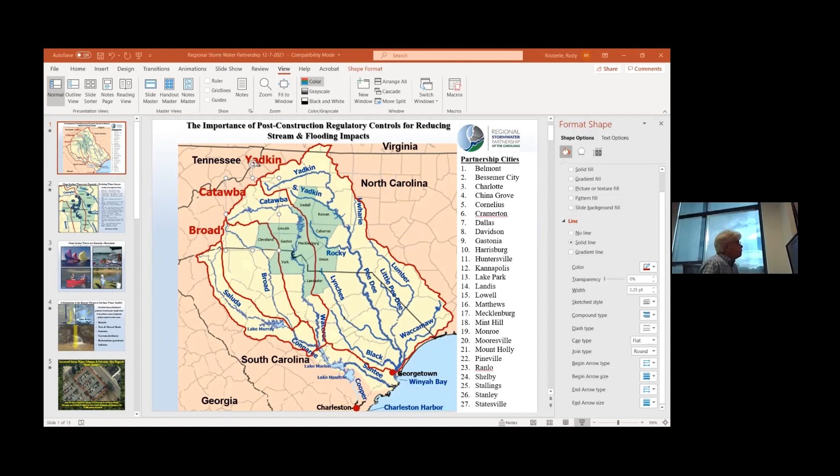Well, good morning everybody, hopefully you can hear me, and hopefully right, is that true? Yes Rusty, can you make it a full slide screen? They're seeing it as a PowerPoint view. Can you make it the full slide? Perfect, thank you. Okay, are you seeing that now, Regina? No, not yet, try again. Now I'm pushing the button. Okay, and it's not coming up. Let me stop sharing, try to do it again. Well thanks so much Rusty, that'll make it easier for everybody to see the full screen view, everybody appreciates it. Yeah, let me see, let me try here now. Got my buddy David Caldwell in here. You know, he's my, that's really a sad, that's the great thing, you know. It is a great thing, it's always great. Okay, now let's see here. Share screen. But why in the world do I have all these different screens open? Can you just share your presentation? Okay, how about now? Perfect, thank you so much, looks great.

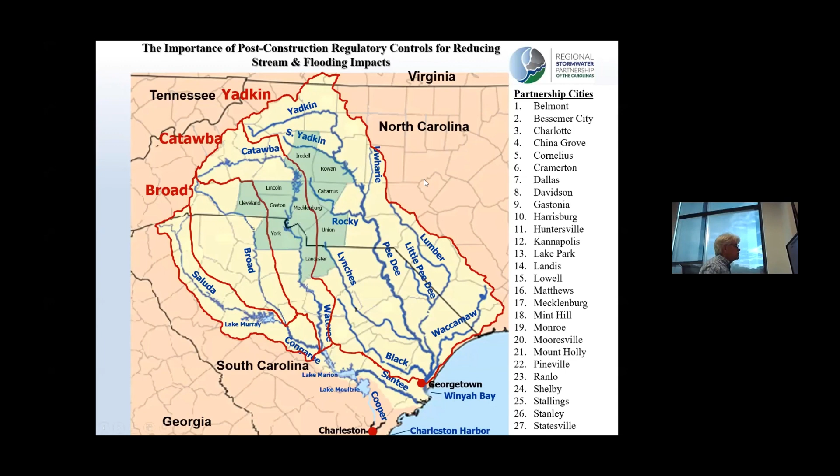To know about the Piedmont of the Carolinas, our region in particular that we're talking about today, is that groundwater is not a viable source of drinking water. It just does not provide the yields. So a lot of smaller communities used to rely on groundwater supplies, but as they grow, they have to tie into a surface water source.

Maybe they join in with, like Stanley has tied into Mount Holly's drinking water supply. Some other communities have tied into Gastonia's drinking water supply. So ultimately, as we become more urbanized, we all end up pulling our drinking water from a surface water supply, right?

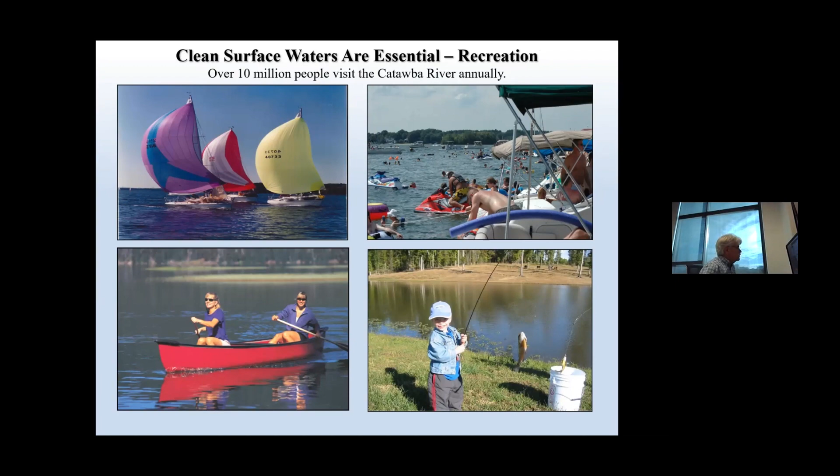Other than as a drinking water supply, obviously these surface water supplies are hugely important for recreation. Duke Energy estimates that about 10 million people visit one of those Catawba River lakes every year, and that is supposed to increase significantly. So our surface water resources are extremely important, obviously. I think y'all probably realize that. Hopefully this is a reminder to you.

But the other kind of hidden bullet or secret bullet associated with urbanization is the increased volumes and velocities associated with the increased impervious area.

So if you take an acre of trees here in our region and put an inch of rain on that acre of trees, the trees will soak up that water. A lot of it will settle into the ground and become part of the groundwater supply, but there will be basically no runoff from that 1 inch of rainfall.

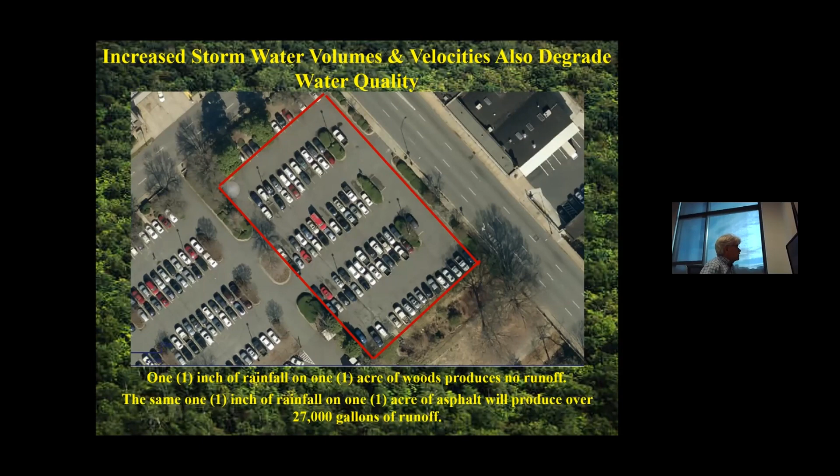But if you cut those trees down and put an acre of asphalt, that same 1 inch of rainfall produces 27,000 gallons of runoff. So that 27,000 gallons of added runoff causes the volume and the velocity in our receiving streams to increase.

So this creek scour, this creek instability, is sort of the death blow for organisms downstream. And we believe here in Mecklenburg County our biggest source of stream impairment is lack of biology. We have tied that back predominantly to the increase in volume and velocity associated with urbanization and increase in impervious areas. And if it's not already happening in your community, it will happen soon.

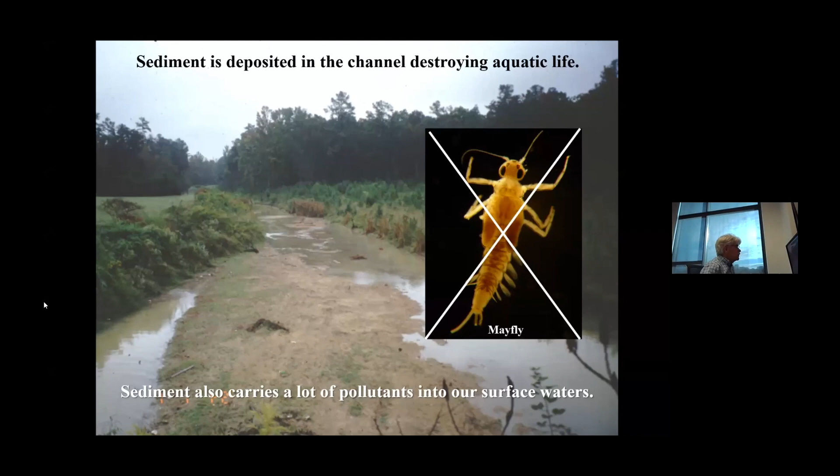So 1 inch of rainfall in Mecklenburg County with its impervious area will generate 2 billion gallons of runoff, which is enough water to fill Panthers Stadium 8 times.

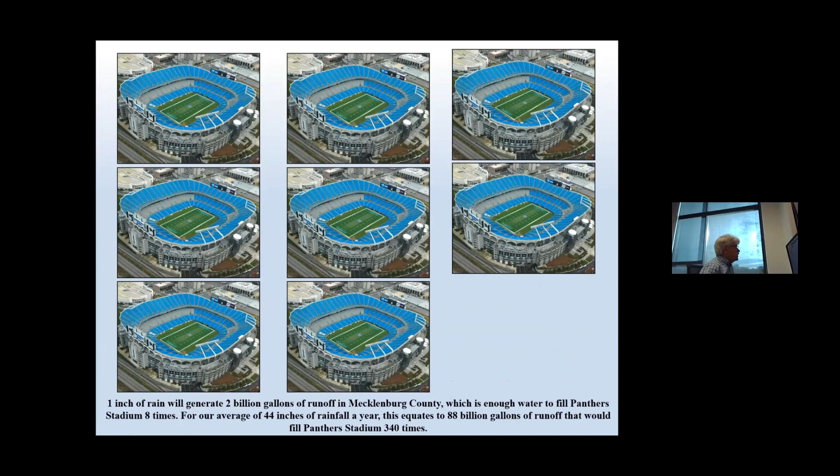Okay, we get about 44 inches of rainfall a year. This equates to 88 billion gallons of runoff, which would fill Panthers Stadium 340 times. That is a lot of water carrying a lot of pollutants, moving real fast and increasing volumes in our streams that were never naturally designed to receive and transport that volume, resulting in a lot of stream degradation and reduction of aquatic habitats.

So what does that mean? Well, obviously, if you have population growth, you have more urbanization, or more of an increase in impervious area. Although I don't have the impervious area data for these different counties, I know, and you know too, that there's been an equal or greater increase in impervious area associated with this increase in population.

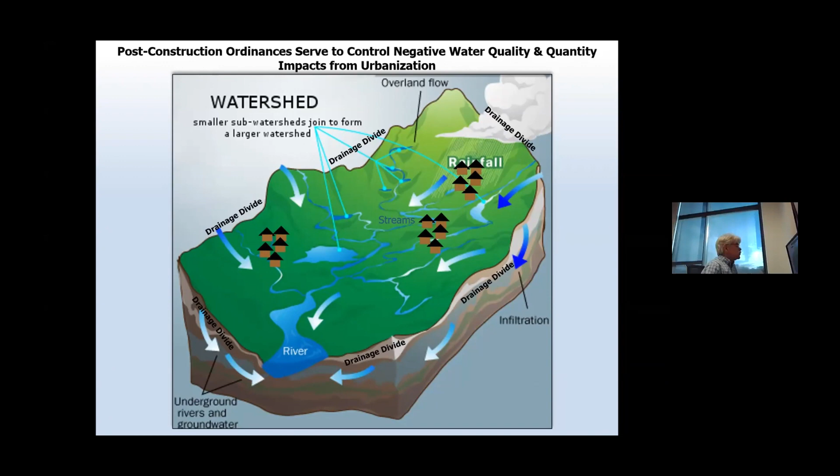What happens in our communities as population increases is you put in more homes, more rooftops, more roads, more parking lots. As a result, you increase impervious area and urbanization, you increase non-point source pollutants, and you increase volumes and velocity. So our post-construction ordinances require at a minimum two things.

One, when you reach a 24% built upon area, impervious area, you have to install engineered stormwater controls to collect that stormwater, reduce your volumes and velocities, and settle out or treat your non-point source pollutants.

The other thing post-construction control ordinances require at a minimum is a 30-foot no-build zone along the banks of your receiving stream or water body. These no-build zones keep impervious area further away from the stream and help control non-point source pollutants. Some jurisdictions have wider buffers, and some require stormwater controls at less than 24%.

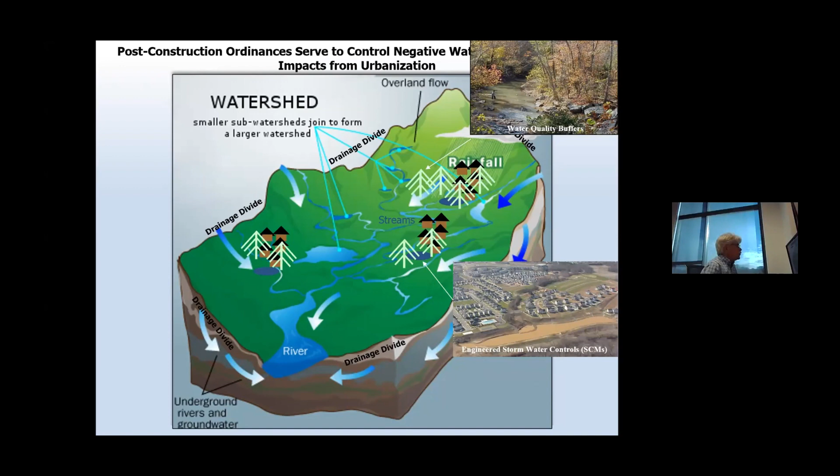It also has buffers that go all the way up the entire 100 feet, or the entire floodplain. So if you have a drinking water supply in that watershed, it's elevated to a drinking water supply watershed designation, and you have to have water supply watershed protection requirements, which are just more controls

added to the post-construction ordinance requirements. The criteria for requiring stormwater control measures is still greater than 24%. The buffers, however, for greater than 24% are increased from 30 feet to 100 feet, and it's supposed to be undisturbed.

I wanted to emphasize a few things about the limitations of these post-construction buffers. I think they do a good job, but you need to understand they don't do the entire job - other work is needed, and I wanted to point that out.

One of the limitations of our post-construction ordinances is that in 2018, Senate Bill 469 passed and became Session Law 2018-145. It went into effect December 27, 2018. Basically, it says you cannot require stormwater controls for pre-existing development when redevelopment occurs.

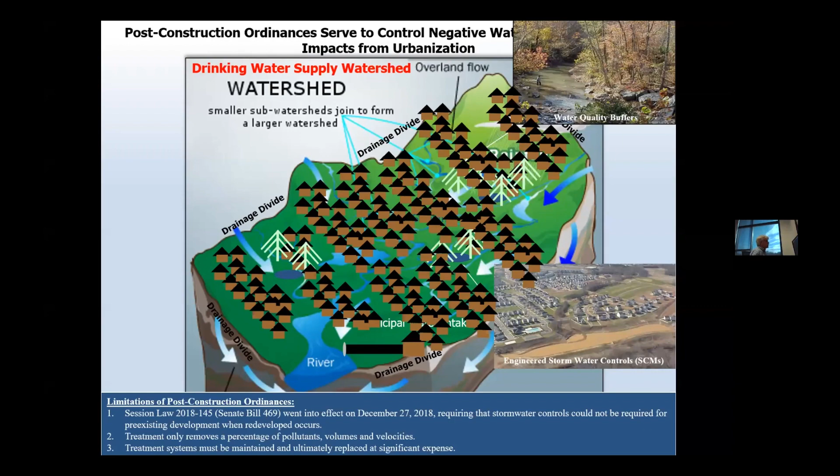So how do you do this? You have tree save requirements, you buy land and put it in conservation. I think you can never lose sight of that, because that is hugely important to controlling non-point source pollutants and increased volumes and velocities.

It drains to Gar Creek Cove, immediately upstream of the primary drinking water supply for the city of Charlotte. We have, for the past - set aside land in this watershed as part of conservation easements. We've had 1,500 acres in Latta Plantation Nature Preserve, and we've been doing this for a long time. We did it purposefully to protect this cove, recognizing that it would impact the drinking water quality.

And why I wanted to point this out to you - we monitored this cove. We've been monitoring it for 50 years along with the other coves up and down the Catawba River. We have witnessed in this cove that, of all the coves we monitor, it is one cove where we have seen the least negative impacts from urbanization. You think that's common sense? It's not common sense. The moral of the story is, if you can set aside areas and not develop them, it really does the best job in protecting us from the negative impacts of urbanization - far better than post-construction controls.

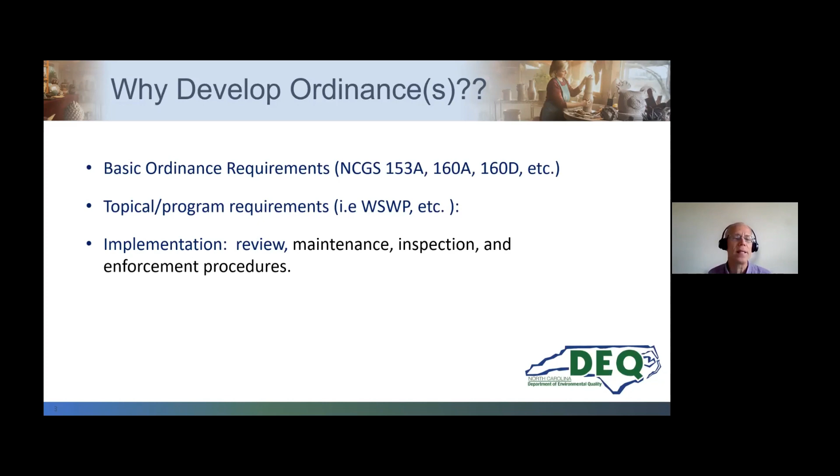The reason I included them is because it's often useful for a local government to be able to group issues that are more similar to each other, water related, or flooding and erosion control as well, to group them in the same area to make it easier to find things.

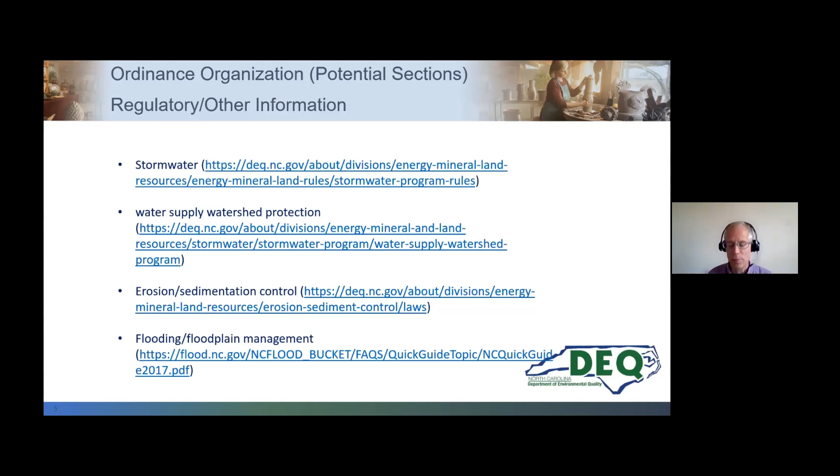Okay, just one item which I'm sure most, if not everyone, is aware of for local governments in terms of a recent update in ordinance development, and that is Session Law 2020-25, which was to become effective July of this past year.

Basically, it was mainly an organizational improvement. As it says here, it consolidated some statutes, put them in a format that was more logical, more coherent, made it easier to find things, and more consistent, while at the same time allowing still flexibility for the local governments in implementing these ordinances.

All right, what I'll start with is there are certain exceptions where you don't always have to implement post-construction requirements. You don't always have to have post-construction requirements in place for every single activity.

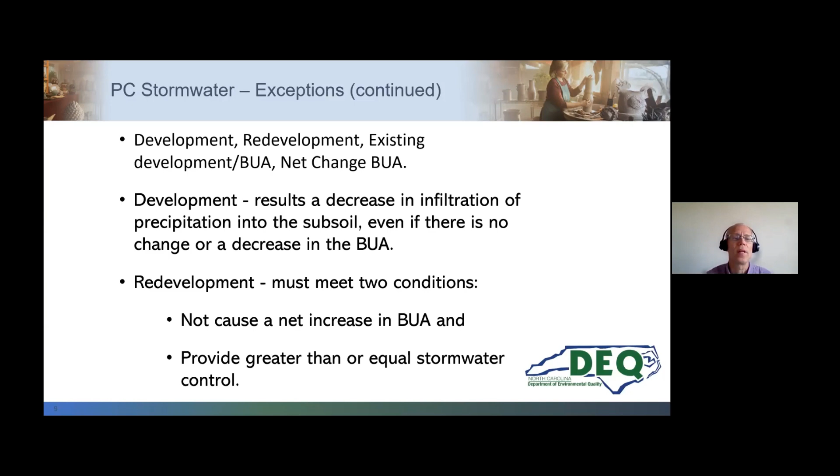So I hope this slide helps when you're making decisions about whether requirements apply. And then there's also, that was the exception category.

Now I'll talk a little about the prior authorization category. So as it says here, a project does not have to comply if it has a valid, unexpired, unrevoked, non-terminated authorization obtained prior to the effective date of the rule.

So these are also building permits and site-specific development plans, phase development plans. These are all examples of prior authorizations where, again, you may not necessarily have to apply post-construction requirements for that particular project. I won't really have time to look at the map, but

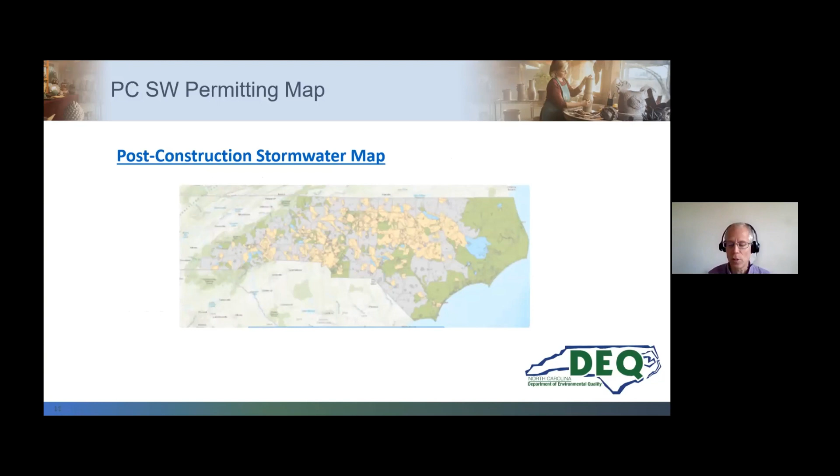I just want to make sure I get through my slides. So for post-construction, there are some key requirements that pertain to all of the different post-construction stormwater requirements.

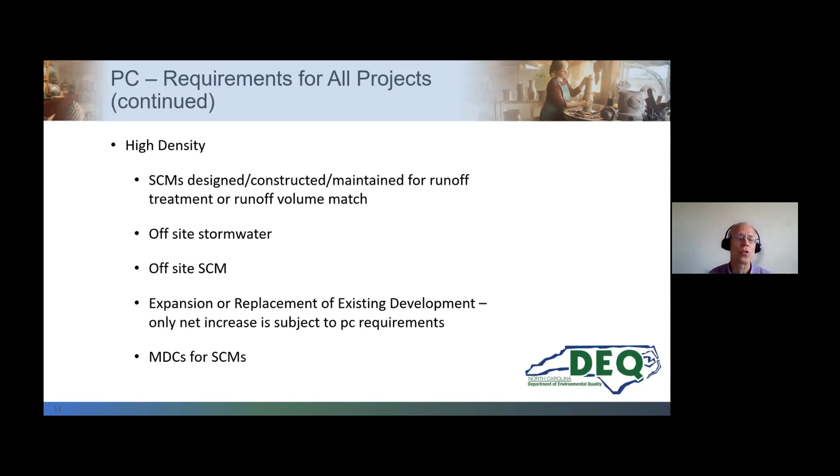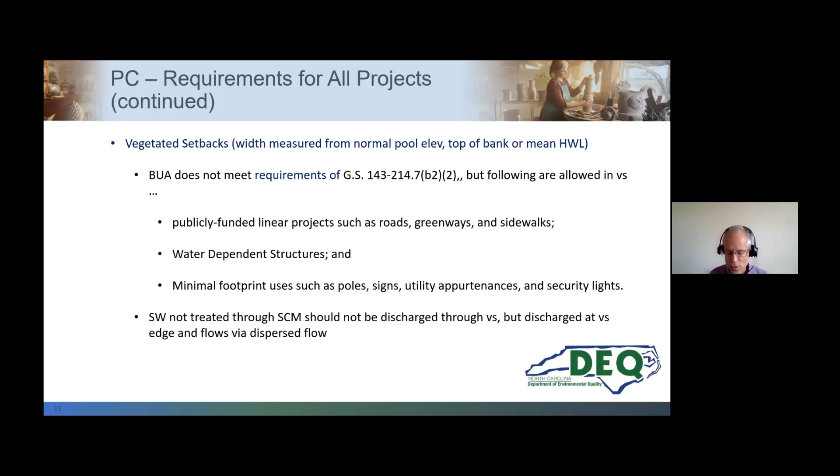I mentioned the same thing again, that the stormwater should be discharged through the vegetated setback - it goes through it, not bypassing it, essentially.

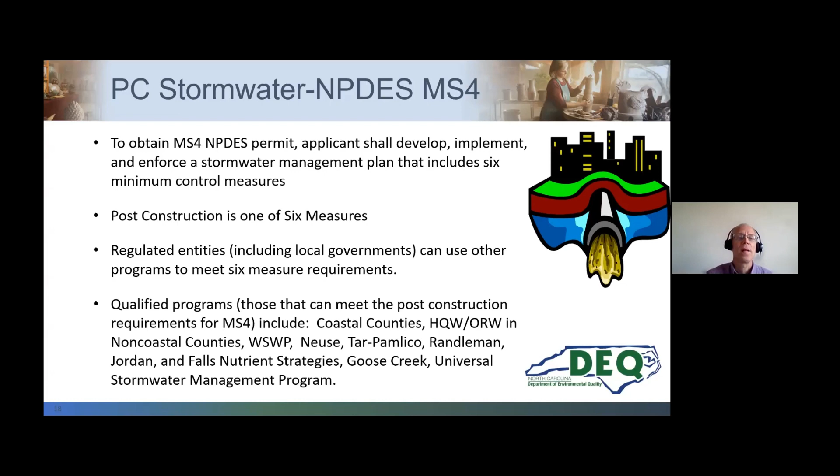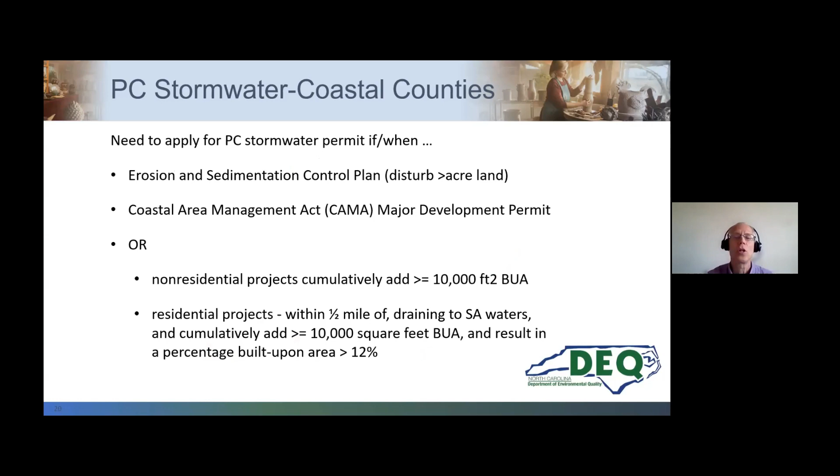For the coastal program, how you apply this: if you disturb an acre or more of land, or if you have to obtain a Coastal Area Management Act (CAMA) permit, or if you meet these built upon area drainage to SA water requirements, then you would have to look at meeting the coastal post-construction stormwater program. These are the high density, low density requirements associated with that program.

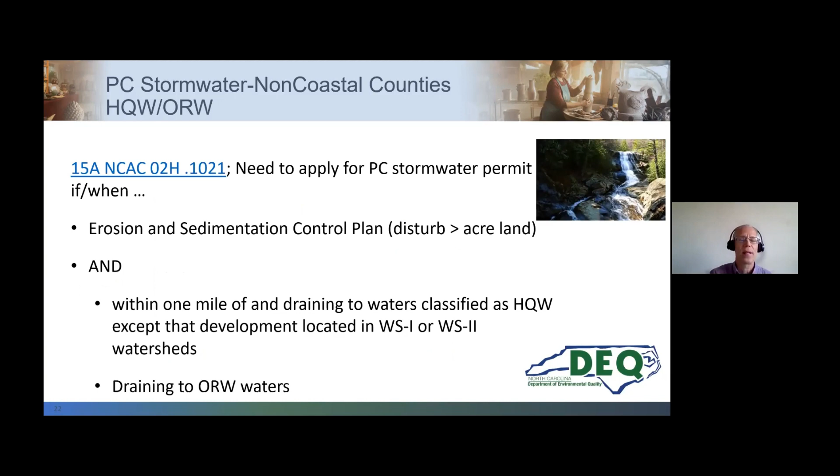And then again, draining to outstanding resource waters. These are the associated high density, low density requirements for the non-coastal ORW high quality water program.

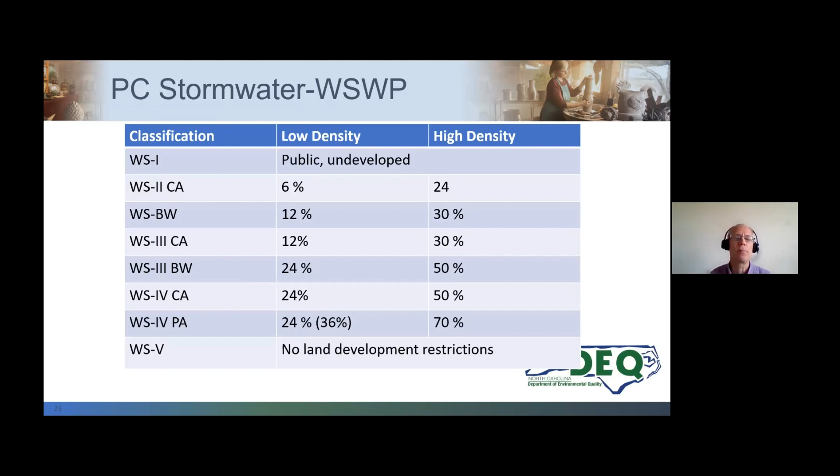The water supply watershed protection program, as it says, if all or part of your jurisdiction lies within either a water supply watershed protection critical area, watershed, or protected area, you have to abide by the water supply watershed protection requirements. This is the table - Rusty was referring to this a little bit, because Mecklenburg County and Charlotte fall in the 24% category, which you see at the bottom of this table. There are other classifications that fall within the water supply watershed program as well, as you can see on this table here.

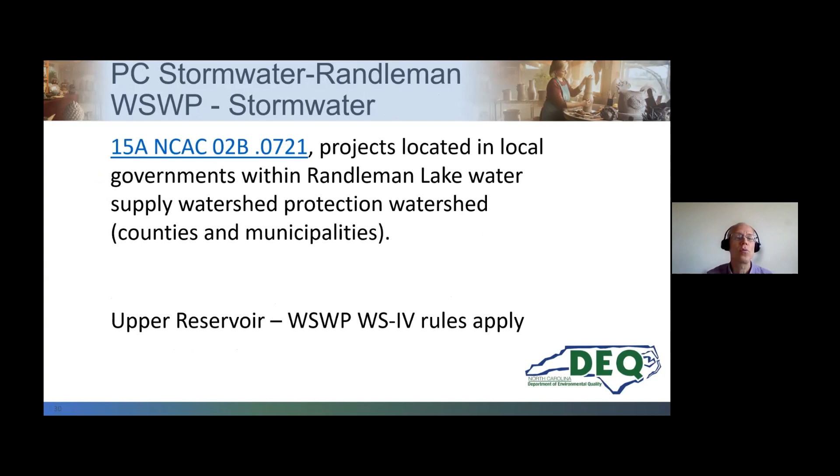I also note NSW for the Neuse River Basin, because we've got a Falls Lake program - I'll get to that in a slide or two. These are requirements for those parts of the Neuse that are outside of the Falls Lake watershed, since it has its own program. There's also a Randleman Lake program related to water supply watershed. For the upper reservoir, you just abide by your Water Supply Watershed Protection WS4 rules, but for the lower part of the watershed, you have requirements associated with low density and high density.

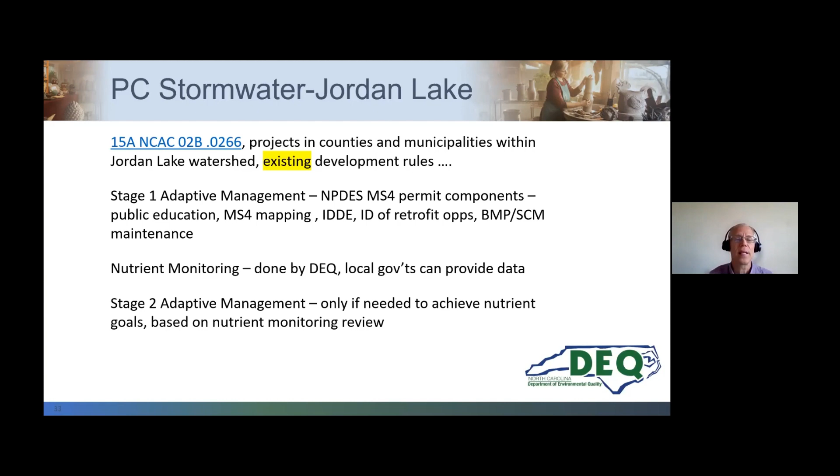Now we have Jordan Lake, again another nutrient management strategy area. Here you can see the requirements are associated with the nutrient limitations in this area, and these can be complicated. I'm running out of time, but basically there's this requirement for new development, and for existing development it's more of an adaptive management approach - you try to implement some existing things, you monitor, and then see if more requirements are needed.

Okay, more requirements here associated with the next program. Sorry, I'm just running out of time. Oh yeah, this is the Falls Lake watershed. Again, it's similar to Neuse, but there are some differences in terms of disturbance and meeting nutrient requirements.

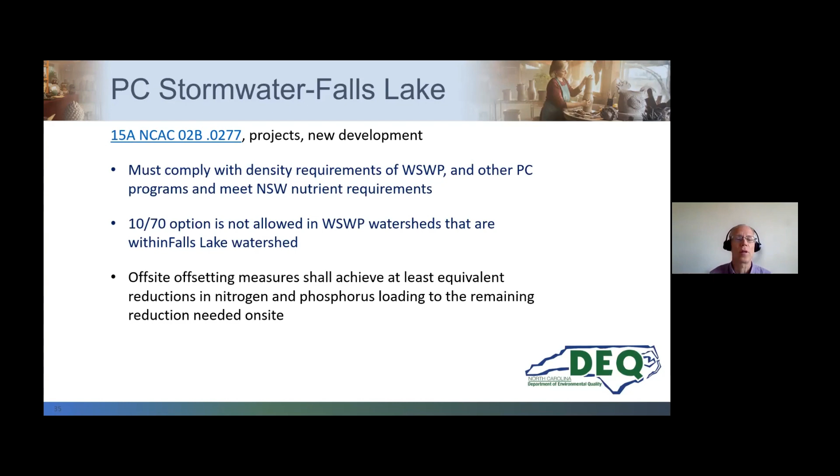A key thing to note, going back to the water supply watershed program, is that there's an option called the 10/70 option within the water supply watershed program. You're not allowed to use that within the Falls Lake watershed because of the nutrient requirement program associated with the Falls Lake watershed.

We also have an area closer to Charlotte, Goose Creek - that's the Six Mile and Waxhaw Creek watersheds. This was done, as you may know, to protect the heel splitter, the Carolina heel splitter. They have their own program for that area - if you disturb more than an acre resulting in BUA, you have to implement the post-construction requirement in this area.

Finally, there are also post-construction requirements associated with the 404, the 401 program. Anytime you impact a North Carolina water or wetland, the Army Corps will determine the type of 404 permit needed. They work with the state in determining the type of 401 water quality certification. There are several different water quality certifications, but associated with those certifications there are stormwater management plan conditions, and that's where the post-construction element falls within the 404, 401 program.

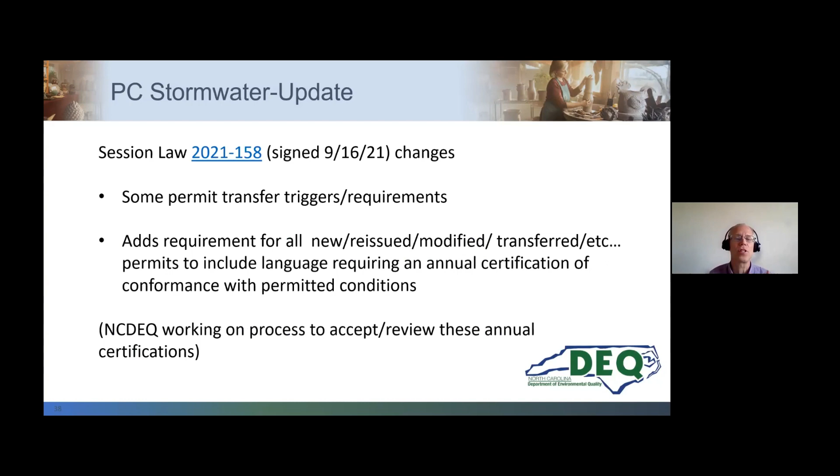Just wanted to state briefly, this is a post-construction stormwater update. It allows for, as it says, some permit transfer capabilities. It also has a requirement for requiring annual certifications. As you can see, this is a very new requirement, and DEQ Stormwater is figuring out how we're going to implement this with the different folks to which it applies. But this is just out here, and we're working on implementing this new requirement. This is just a few months old.

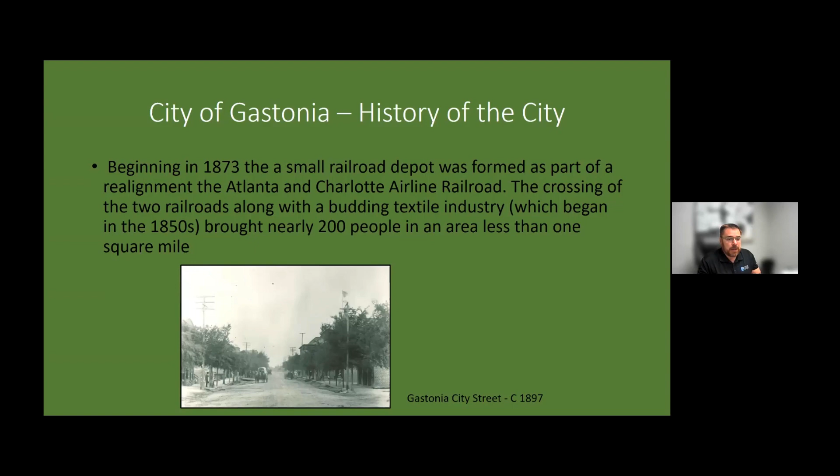So if you consider back then, here's a bit of the infrastructure that was around in 1897. You can see that there are some light poles, but there's also some horse and carriage.

In the late 1800s and early 1900s, Gastonia quickly became known as the combed yarn capital. We had 5 mills with a growing population at that time of 5,000 people. The growth occurred primarily as innovations and adaptations of the yarn process, so textiles really became the key component for the city. Very quickly, we had a mill that was rivaling, the closest one was New England.

That really put us on the map as far as fabric and yarn production in the area, and the mills really became the driving force for this area. We saw industries as early as the 1800s and 1900s. So we're a little bit different than Mecklenburg, much more of an industrial area as far as yarn is concerned, and a lot of our agricultural land was sacrificed for housing and for mills and manufacturing in the Gastonia area. Gaston County still had a lot of agriculture, but I believe it was the 1900s when we were primarily called an industrial area. We're never really known as an agricultural county, unlike a lot of the other counties within the state.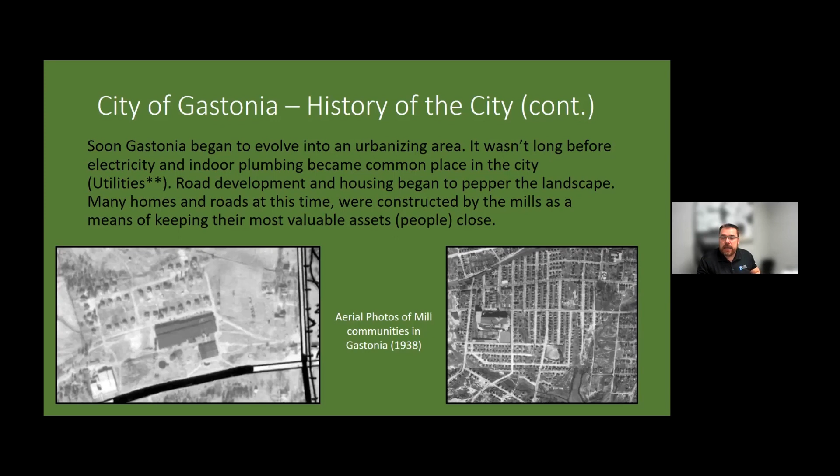So today we have remnants of a lot of things, a lot of the planning or lack of planning, depending on what to say, that occurred all the way as far back as the late 1800s, early 1900s. The advantage is that a lot of the downtown and mill communities were constructed by local tradesmen and former agricultural laborers.

The reason this is advantageous is, as you know, in the southern Piedmont our soils are highly erodible land. I'm grateful to be back in the area because we're close enough to the mountains to go see them, and we're also not terribly far from the coast. We're ideally centered, but with a more aggressive topography than we have at the coast and highly erodible lands, you need to be able to control your drainage. That is what most of the development we've seen here, going out on site, accounted for, because the developers were used to building on terraces, used to dealing with drainage and trying to get the water to go from high elevation to low elevation.

So even now, going into our older infrastructure, you'll see that some of the drainage ditches were there, even if they're legacy ditches that need to be reestablished. It was at least accounted for, which is positive for sure.

Stormwater is also accounted for in municipal infrastructure. The native materials for rock line channels, common practice around here, was terracotta piping in the late 1800s, early 1900s. We still see legacy piping out there all the way into the 50s - piping that has been underground. How do you take old infrastructure and tie it in with new infrastructure? Many of the infrastructure that was established wasn't considered, the long-term effects weren't really considered on this. Here's a good example of that.

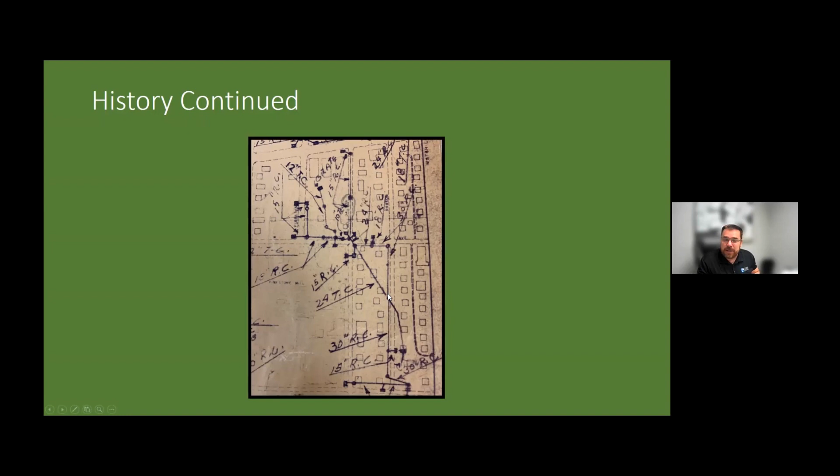So if this house collapses, guess who's responsible? We have to take all of these situations into consideration on a daily basis.

But despite its consideration for stormwater, like I said, most of the challenges were just trying to move water from high ground to low ground. Like much of the country, there wasn't a lot of thought given to water quality or water impacts.

Gastonia really was no different. This is on Highway Franklin Boulevard. If you come visit Gastonia, you stop at the Cookout on Franklin Boulevard, right near the Salinas car lot. This is an old car lot that used to be where the Cookout is, and you can see some of the problems that Duhart's Creek, one of our primary creeks, had at that time. There are cars flooded because of improper stormwater management.

It wasn't really given a high consideration. Again, just moving water from high to low. And this is Highway 74, a main thoroughfare. It's interesting, real quick, an anecdote here.

The guy that operates Salinas, Sal Salinas, told me he used to work at this car dealership before he purchased it, before he became Sal Salinas of Salinas Chevrolet, or Salinas Honda. He recalls that lot flooding all the time in the 70s. It wasn't just occasional, it was almost every major storm. He said that thing would be underwater. It's interesting to see a local businessman have a better appreciation for stormwater control because he experienced it as a young man.

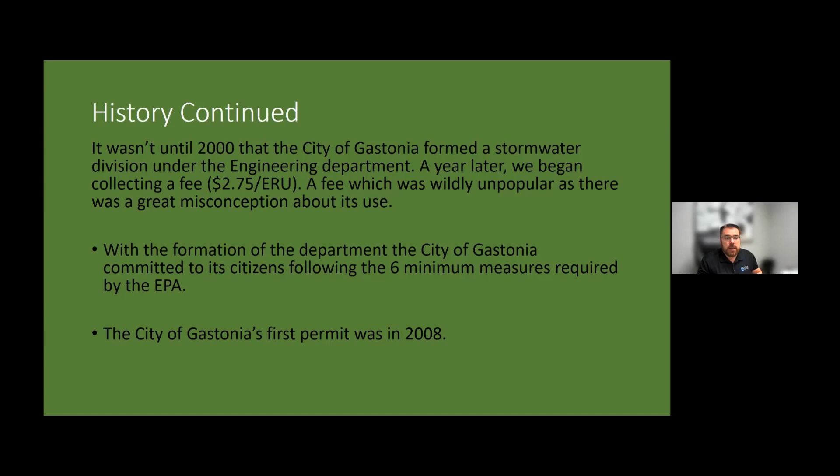With the formation of the department, the city of Gastonia also committed to its citizens to begin following 6 minimum measures with the EPA, and the city of Gastonia's first permit was in 2008.

So Gastonia today, going back to something Rusty had said, if you go back to his slide, and Rusty doesn't know I was paying attention, I was actually taking notes. On his slide, it showed that Union County, York County, Mecklenburg County, and Cabarrus County were the super developers at rapid growth. Gastonia was just at 20%, one of the lowest areas that was developed. So why the lack of development in the area? I believe there was a certain reputation for Gastonia as being more industrial, maybe higher crime, maybe it had more or less to offer. It was west of the city.

I recall going to the doctor down at the coast, and I told him my wife and I were relocating back. He was familiar with the area, having worked in Charlotte for a number of years, and he called Gastonia the Wild West. So it certainly had a reputation that was maybe not unfounded at one point, but I will tell you it is growing by leaps and bounds.

I believe that has to do with the conveniences. We have three major highways that intersect the city, a state park right here, scenic byways, recreational lakes, botanical gardens nearby, and close proximity to Charlotte. The growth is happening at a pace we've never seen before. And it's actually advantageous to be behind the 8-ball on this, to not have had tremendous growth before, because I believe we're better positioned to address greater water quality and stormwater concerns.

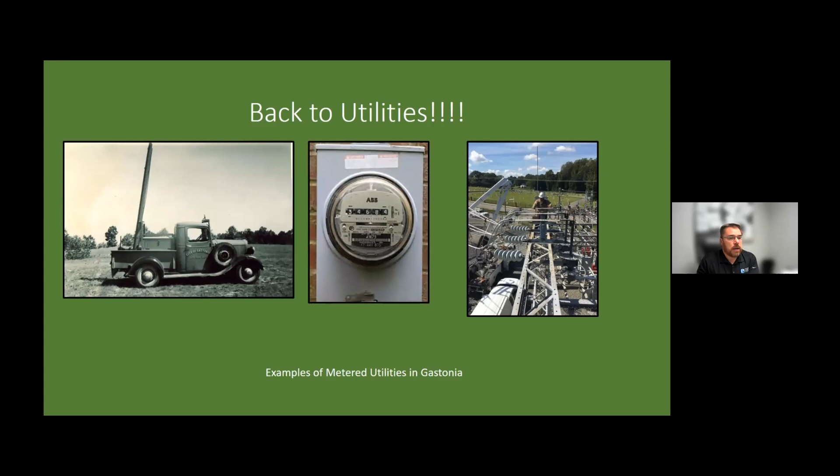Now back to the utilities — one of my slides mentioned that the city of Gastonia started utilities, with an asterisk on there. Our utilities are well documented. When you talk to somebody about utilities, it's easy for them to point to metered utilities like electric — you have to have your electric turned on. Then water and sewer is another one of our utilities. But one of the other utilities we have is stormwater, and stormwater really is the platypus of the utility world. It really is.

I always tell people that stormwater is not important until it rains, and then when it rains, it becomes very important. So we look at our utilities a little differently because this is a non-metered utility, and it ends up being very different than any of the other utilities. Our public rightfully demands an answer as to why in the world they're getting billed for stormwater, and I believe we have that answer. We just need to educate.

So when we talk about utilities, we're charging a fee. Our fee was originally $2.75 in 2000, so in 2001. In 20 years, the fee has moved the needle to $3.75 as of last year. So we really are very low in our utility fee collection. And with the exponential growth, we're going to have fee adjustments for stormwater. A lot of people don't understand why.

Here's one of the main questions: how do you bill a fee that can't be turned on or off? Well, regardless if you have an abandoned property or a parking lot, you're contributing to the stormwater infrastructure every time it rains. This goes back to the slide Rusty had — I see Rusty's not sitting at his desk, which is great, so I could talk about it. One of his slides showed that when you create an impervious surface, you're putting greater pressure on your infrastructure. Who is billed? The person who owns the property is responsible for it.

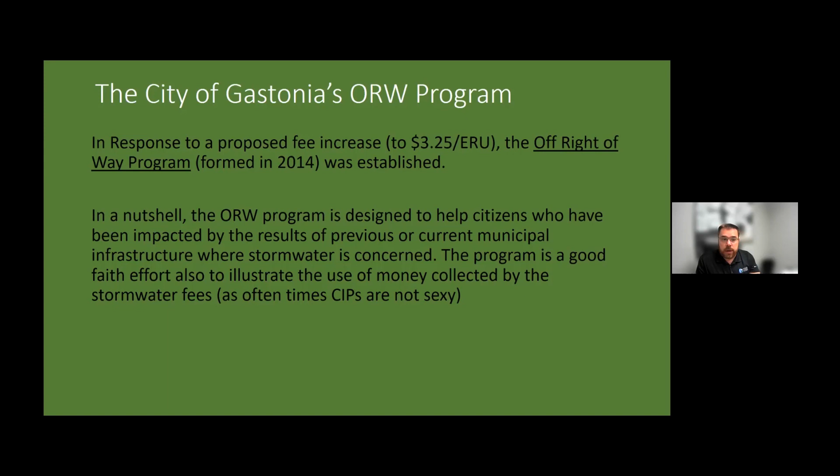As an example, this is a project we had. This is a drain that was going under some people's driveways. It was a creek running through this pipe. The driveway was built over the creek a long time ago, and the level of water coming in from the roads increased the pressure on the pipe. So we came in, installed a slip pipe, repaired the driveway, and stabilized it, putting an appropriately sized pipe in to ensure the water was reducing erosion.

Do we still have hurdles to overcome? In the immortal words of the Kool-Aid man, oh yeah, we got lots of hurdles that we still have to overcome. Just to give you a brief rundown of where we currently are today, the city of Gastonia has nearly 78,000 people, and we're growing by leaps and bounds.

I understand that Gaston County Natural Resources Department is on the webinar right now, and if you were to talk to them, they would tell you they see development coming in throughout the county, and this number will definitely change by the next census. But right now we just have 3 staff members. We just hired our 3rd staff member in August, so we're getting up to speed to handle the level of people and the concerns that we have.

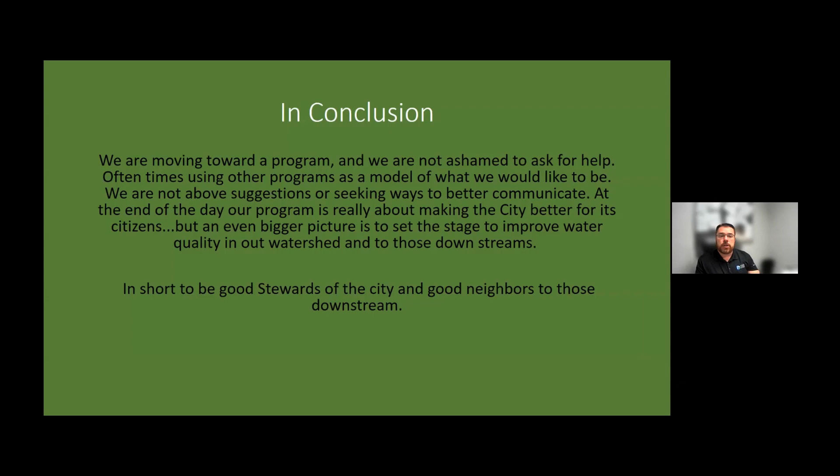So in conclusion, which is the slide I started with, we are moving towards a program. We are not ashamed to ask for help, and oftentimes using other programs as a model of what we would like to be is what we do. We're not above suggestions, so if anyone has suggestions or constructive criticism, we're always open to that. And the big thing is the quality, not just to our watersheds and not just to those two impaired watersheds, but again, to look at the big picture that we're looking towards our neighbors downstream. We want to be good stewards to the city and also good stewards to the neighbors downstream, and it's important to remember who those neighbors are.

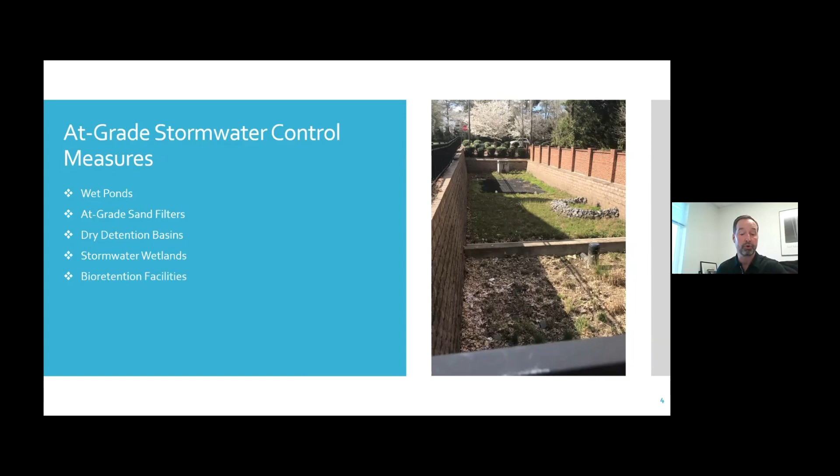One of the primary concerns with at-grade SCMs is access. Many of the problems that we see begin with poor access. Poor access prevents good maintenance practices, including regular mowing. Second, poor access prevents proper inspection on a weekly or monthly basis. So when regular inspections are not completed, simple problems such as a clogged outlet that could have been easily addressed become major maintenance issues if left alone too long.

So what do we mean by access? We want easy access to the facility for mowing. We want 3-to-1 slopes or flatter for mowing. We also need to access the entire facility for more in-depth or larger repair projects, so you want to be able to get in there. And we need to be in the proper location so that we can access all of the areas and inspect all of the areas.

A few points to remember about access: every facility needs maintenance, and some will definitely require more extensive repairs at some point. If you don't anticipate those future repairs, which would include the use of heavy equipment, then you're being a little bit short-sighted, and it's going to cost the owner in the long run. Second, if all the sites and all the areas of the SCM are not accessible or visible, those areas will be forgotten about. And when it's not inspected and it's forgotten about, it's going to lead to increased repair costs in the future.

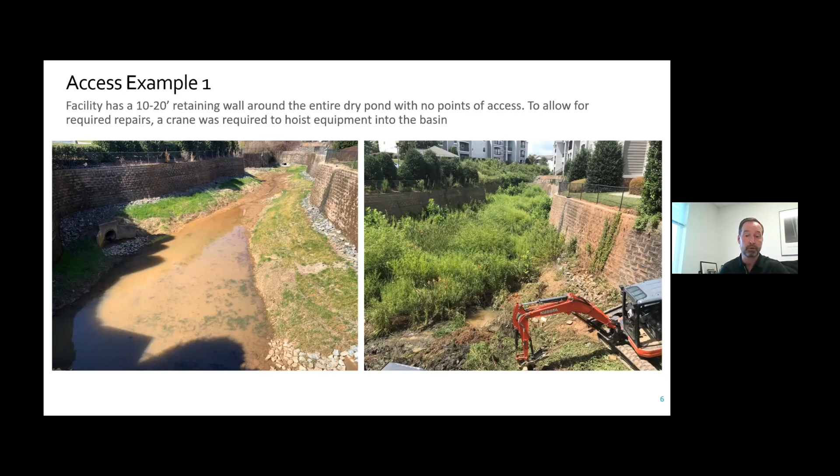This first slide I'm showing you is a bit of an extreme example, but not that uncommon. It's a dry pond, should be a dry pond, completely surrounded by retaining walls. What you see on the right is what happens when a facility cannot be accessed. That dry pond has been overgrown, silted in, and major repairs are needed because it's been neglected. In this case, even getting that piece of equipment into the basin required a crane to hoist that equipment in. Obviously, an extremely costly repair to the owner.

And either way, any mowing on that facility is going to be more expensive just because of the limited access to the facility. So always have an access point.

This last example is probably something more typical that we see, not necessarily due to retaining walls, but difficult access, and maybe that access not being thought through in its entirety. You can see the gate in this picture on the left, and to get to that gate you're blocked by a pedestrian railing and sidewalk. There's just no real clear access for contractors or landscapers to maintain that site. The side slopes getting into there are a little bit steep, and this could have been done better. I'm not saying that's the only reason this hasn't been maintained for a while, but a proper access way down to this gate would have been the ideal access to that site. So please try and keep that in mind.

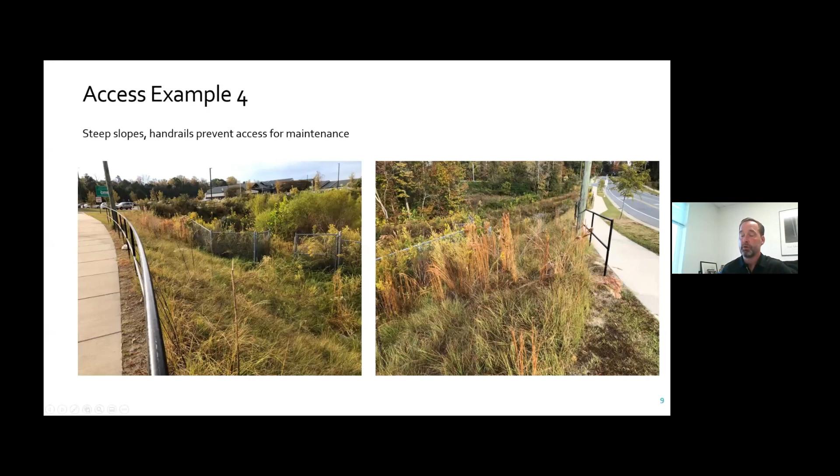So regarding wet ponds themselves, there's a couple things that we really need to recommend for maintenance. First, dry land access to the riser structure. Second would be an accessible and maintainable water quality inlet. And then, as per any at-grade device, we want to have complete access, and we want to have 3-to-1 slopes for mowing.

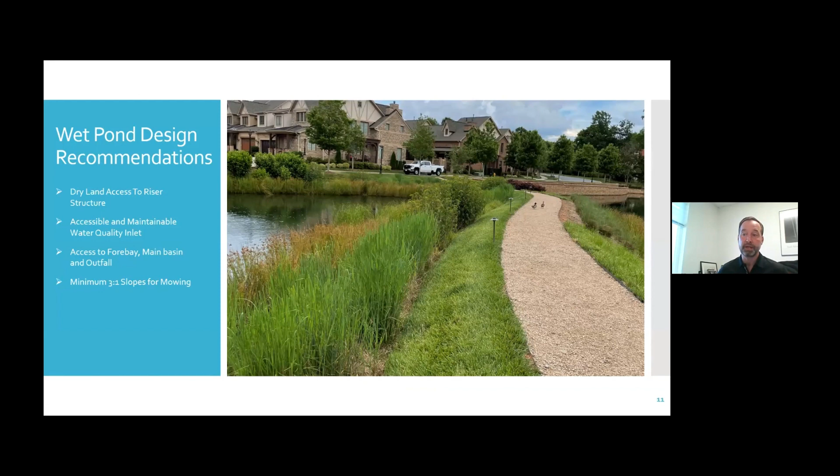So for dry land access, what do we mean? The riser on the left would be perfect — you can get to it from the embankment. That pond is at normal pool at this point, and you'll be able to access the riser and get inside for inspection and maintenance. The one on the right, not so good. You can see there's a lot of vegetation and debris on top of that riser, and this is at normal pool.

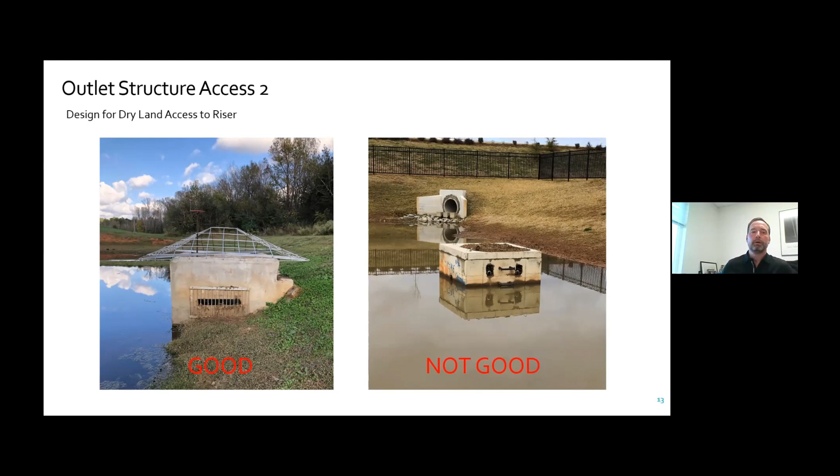The next thing we'll talk about is the design of something maintainable and easily cleared, like a turn-down riser. The water quality inlet is where we see problems most of the time with clogging in these facilities. You have to anticipate that those water quality inlets will get clogged. So how do we address that?

Okay, so we're going to jump to dry pond design recommendations. I think this first bullet point is the number one thing, which is that these dry ponds need to have sufficient slope on the basin to function and allow grass to grow. We're going to say minimum 2% on that design to allow for that. Second, we want to have trash racks on all the low-level orifices. And then, as we've talked about for all of them, access and minimum 3-to-1 slopes for mowing.

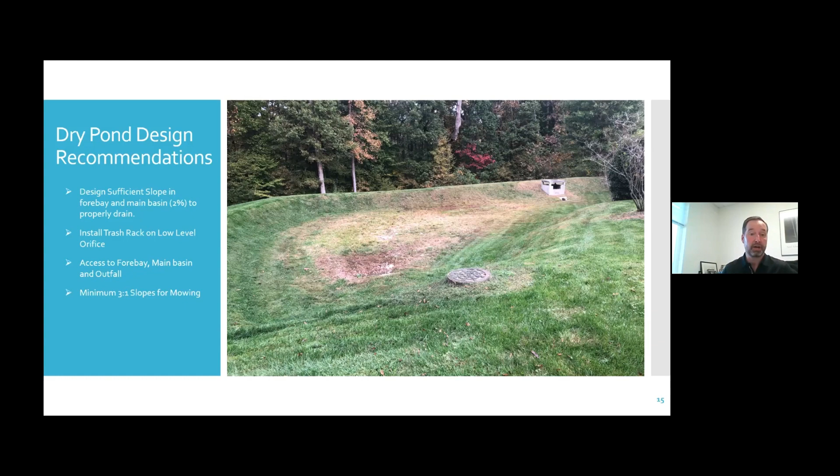So what happens when there's no slope on the dry detention basin? The grass doesn't grow. The area becomes saturated. The landscaper won't maintain it because his equipment, the ride-on mowers, can't ride in there, and then the weeds take over. Once the weeds take over, you start to get bare spots.

So you really want to be aware in the initial design to have at least 2% slope on those basins. The other part is that once these basins are constructed, if they don't have that elevation difference between your inlet and your outlet, it's not something easily corrected in the field. The contractor can't account for that grade difference or make it up. So you're looking at a long-term problem. Always have that slope, 2% minimum.

And they'll have a fighting chance of having established grass in there and not have it be a long-term problem for the owner. So if it costs a little bit on the front end, it's going to be a real long-term savings for the owner. Also for dry ponds, trash racks - make sure there's a trash rack on that facility.

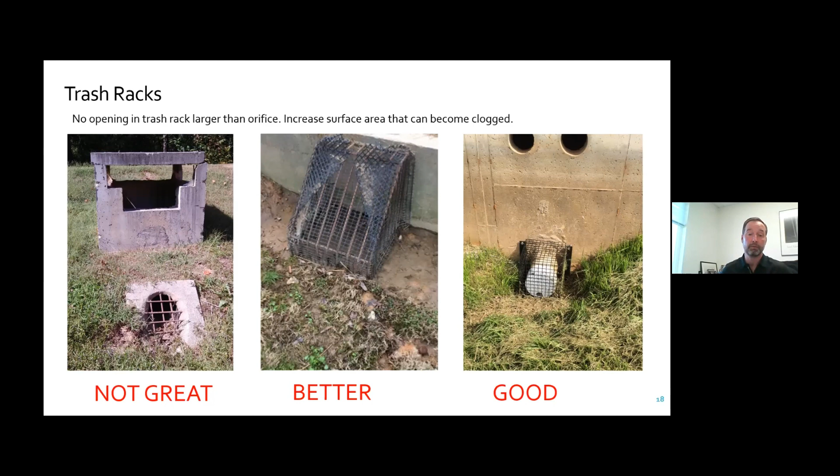This is probably a more recommended design, similar to what we showed on the previous slide, but it could be as simple as a rebar cage covered in a metal wire cloth, and that should prevent a huge amount of the clogging problems. The clogging of a device, especially for dry detention - if you have pooled water in your dry detention pond, you're going to kill the vegetation in there. You're not going to be able to establish grass. So this is all in the goal of keeping your grass healthy in that dry detention.

For sand filter design, similar to dry detention, we want to make sure we have sufficient slope in that basin. Again, we want water to be able to move and not pool on the grass so that it stays healthy. We want to design without sod or stone above the sand filter bed. That will be one thing a little bit unique and different from some of the Charlotte typical standards, but we can talk about that, and then raise your cleanouts above grade.

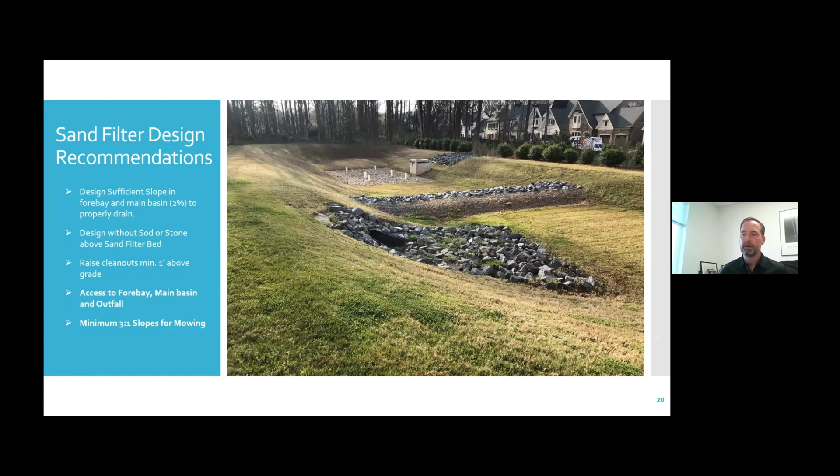So when we say no sod or stone topping, what we're trying to do is anticipate that the sand filter will need to be repaired, or skimmed if you will, of a sediment layer on top of that basin. If there's sod in place or stone in place on top of that sand filter, to be able to skim off the accumulated sediment, you're going to have to remove all that stone.

Let's just anticipate that sand filter will need to be cleaned as part of regular maintenance and remove that. That facilitates everything for the contractor to get that done, again providing the owner some cost savings there.

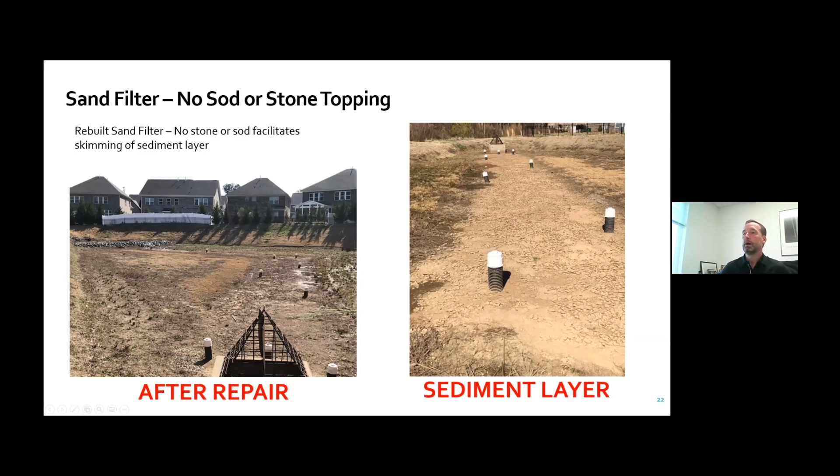So underground SCMs, we'll jump to this. A couple key items: we want to have access to all critical locations, meaning the forebays, sand filters, and outlet structures. We want full access to both the downstream and upstream side of the weir wall, and we want a proper trash guard. This last one is about final inspection—we want to take some time to properly inspect that facility before we sign off on it.

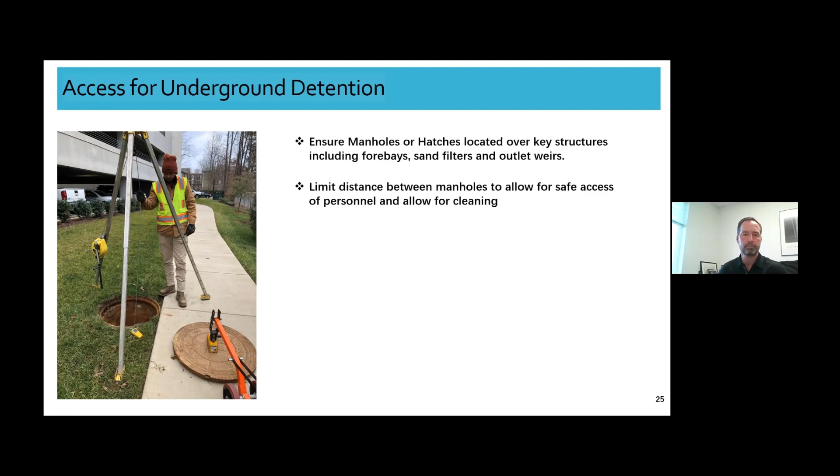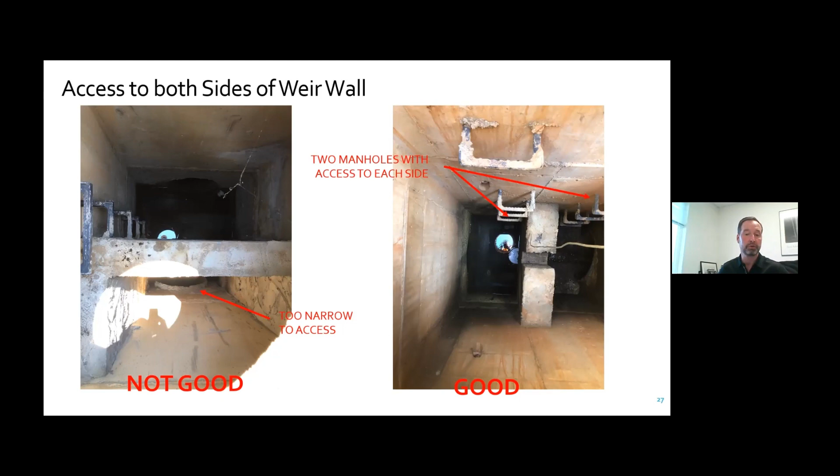Trash racks are a big item to discuss with underground detention. There will be a lot of trash. If you're in a parking lot or roadways, there will be floating trash, heavy sediments, and trash such as shopping bags and chip bags that don't necessarily float and don't necessarily sink. So we always want to have a trash rack over the water quality inlets, the small 1-inch and 2-inch inlets.

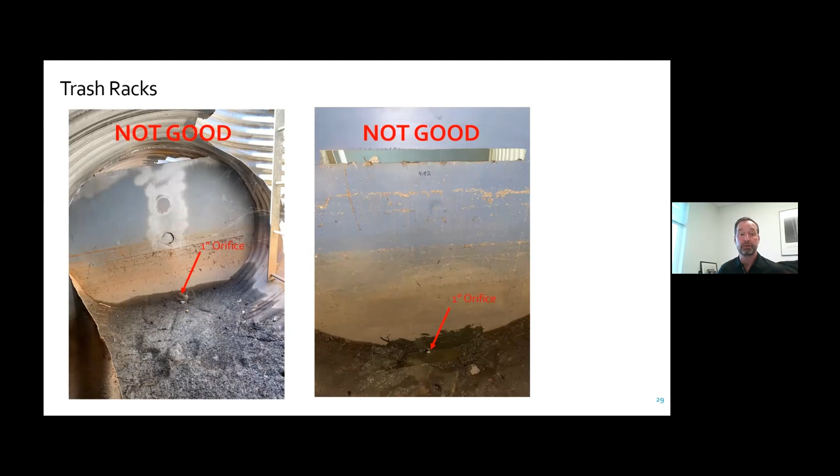Regarding proper trash rack selection, I'm going to skip this slide since I'm running out of time, and jump to final inspection. This is probably the number one item that surprises me when I go down into facilities and inspect these systems.

As a design engineer, you're most likely asked to sign off on a facility at the very end and say that it meets the post-construction ordinance requirements. And it's amazing how many we go down into that obviously have not been inspected in any manner. This particular one, you might say it's extreme, but it's really not.

So the one thing I would caution engineers and recommend to owners is that when you get to the end of a project, or about the time it's being turned over from construction to you, or again as an engineer signing off on it, make sure that you do a thorough inspection of that facility.

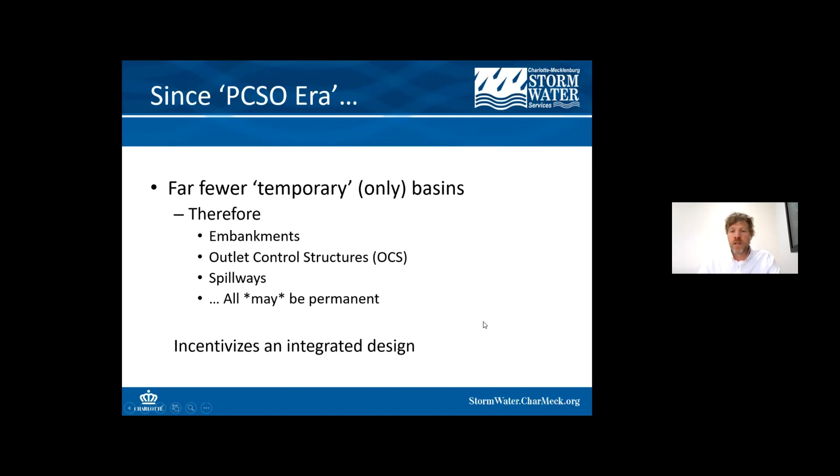So even a small portion of the hopefully long life of your SCM, it's the very beginning of the life of that SCM, and how you approach that design and eventual conversion can make a difference in that conversion and the handoff.

I think these factors incentivize what I'd call an integrated design approach. Not that I need to tell this group, I think there's many experts out there, but I think of integrated design as the planning and design of stormwater control measures, such that your temporary basins may function at maximum efficiency within the same footprint of your permanent structural measure, and vice versa, that your permanent structural measure will function efficiently within the footprint of the temporary sedimentation control measure. So it's important to acknowledge the dual use of those, especially during active construction and immediately afterward.

Broadly speaking, the big steps you've got are the basin closeout and clean out, SCM configuration and construction, and then at the very end your as-built and turnover. Every step we really want to keep long-term O&M, or operation and maintenance, in mind. I apologize if some of this is redundant, I've pulled these slides from many different presentations, so forgive me in advance.

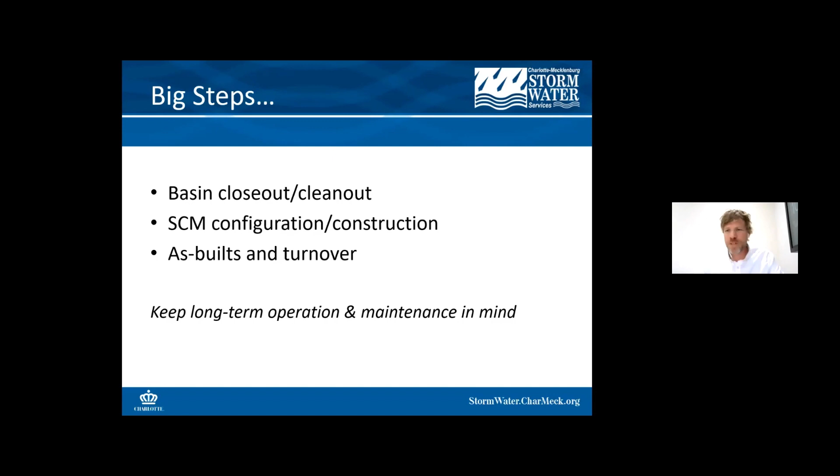But we'll start with the easy part when it comes to the SCM conversion: the actual sedimentation control basin closeout. If you're on the regulatory side and have some way to exert influence over the process, any way you can start incentivizing planning for closeout and conversion earlier in the process will pay dividends.

Whenever we're building anything, we want to set final grades and establish permanent stabilization. You can't talk about conversion of SCMs without talking about stabilization, so we're going to spend a couple slides on that. Really that needs to be an ongoing and continual process, something the erosion control side certainly emphasizes, and it has to be a priority for the construction site managers, operators, and hopefully the design side as well.

Then of course, a critical part of closing out a basin is flushing and cleaning the contributing stormwater pipe system. Certainly in urbanized areas, and most small towns at this point, have developed stormwater systems and minimum standards, comprising stormwater collection pipes under the street right of ways leading to your permanent SCMs, and you've got to clean those pipes out. If you don't, you get a big surprise at the first big rain after completion, and with a sand filter combination that can be an expensive maintenance burden.

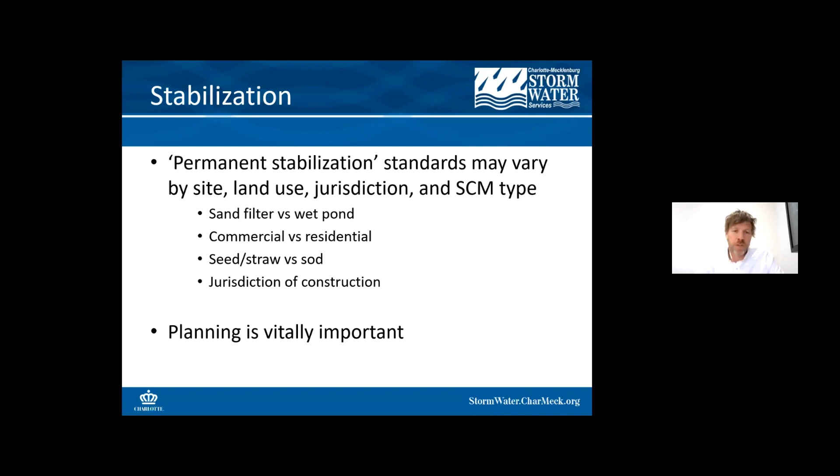As those final grades are set, permanent vegetation should ideally be sown and grown or planted. I often see that the final landscape package or permanent stabilization isn't addressed until we're almost done with the vertical work. So I think it's good to finish horizontal work before your vertical work is finished. Get the outside work done first, get those permanent grades set. Once your building facade and exterior work is done, you can start establishing permanent grades and converting temporary vegetation on slopes and perimeter areas to permanent vegetation, and that should happen early and often.

Of course, you've got to remember to plan around your seasons and weather. So if you've got brown top millet that's browned out because the first frost has come and gone, but it's still dense cover, or it's gotten too cold and browned out, that's the time to start thinking about converting that temporary vegetation to permanent. You really have to take advantage of the shoulder seasons to grow fescue. So if you're trying to grow fescue instead of a warmer weather grass, you've really got to be proactive and grow grass in the spring and in the fall.

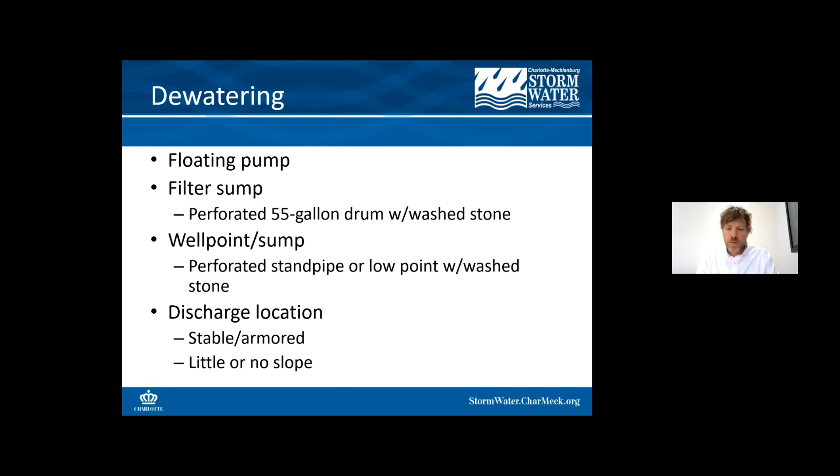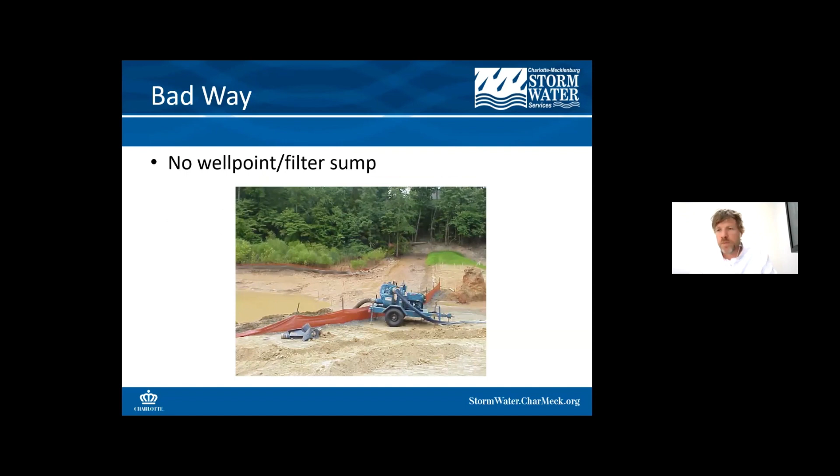A worse way is just a big pump with a heavy inlet thrown right into the slop at the bottom of the basin, done like that, without protecting the discharge point. You can pretty quickly wind up with significant impacts to the receiving stream. These SCMs are for long-term protection of streams and waterways, and this is just a bad way to start out with that.

The big points about the basin cleanout: after you get it dewatered, you've got to dig down a sump, lower that water table as much as you can, and bring the water out of there. Hopefully you got some time for it to dry a little bit, but then you've got to plan for access, remove the trash, remove excess sediment, and establish your bottom grades.

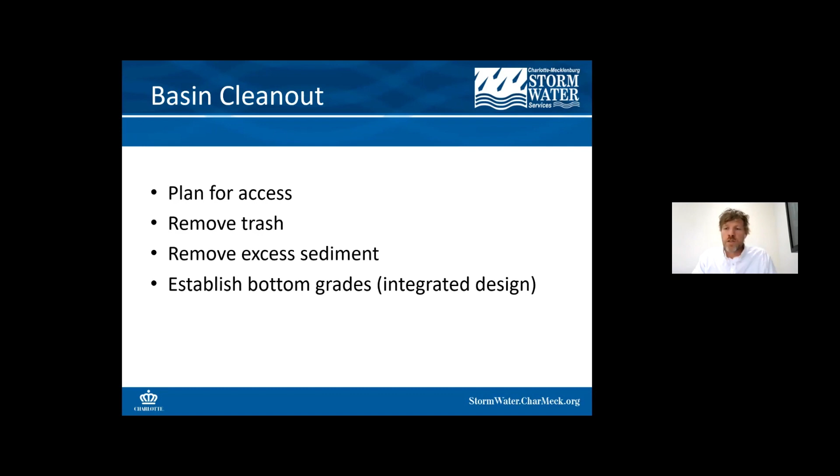That's really the place where, if you have an integrated design approach and you've designed it thinking about these eventual conversions in mind, you may find areas to unlock what I've termed hidden efficiencies. I'd urge you all not to fall into the pattern of 'this is the way we've always done it.' Really take the time to read the plan, the phasing plan, the construction sequence, and see if there are integrated design elements that may make some things easier, or maybe it sparks an idea with your own operations for the next best way to do things.

To safely remove debris and unwanted teenagers from your basin. There's my joke, Danon. That's for you.

Remove sediment. If your sediment is really sloppy and super wet, you should probably think about using polyacrylamides. You've got to consider your spoils locations, and really what you're trying to do at this point is establish your permanent grade on in situ soils or quality compacted backfill.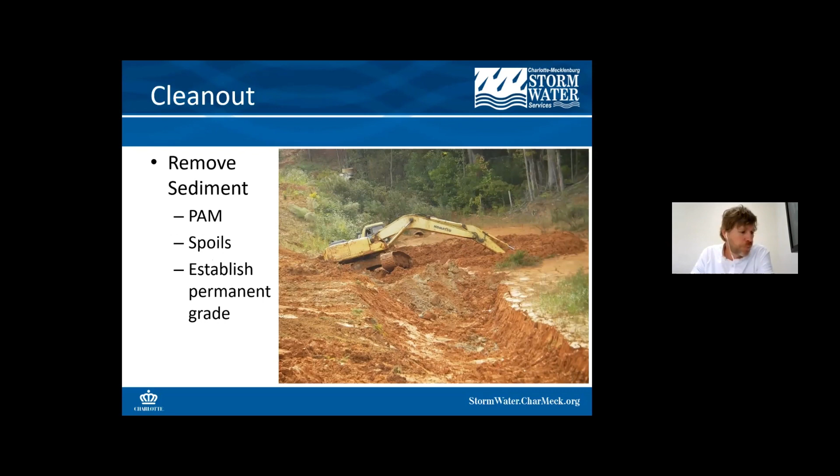I'm not really going to talk too much about underground, although we could spend a whole other session on it. I figured most of the SCMs are probably still above ground. Even though I'd agree with Sean that the most troublesome ones are certainly below ground, I'm really trying to cover as much wall with my big paintbrush as I can.

So let me talk about a few SCMs and some of the things we see: sand filters, extended dry detention, wet ponds. When it comes to the construction of the sand filter SCM, you really want to verify the OCS and inlets.

That should hopefully be done at the initial construction, because hopefully we're building that permanent infrastructure one time at the very beginning of the project. But it's always good to verify that it's like everyone thinks it is.

You've got to excavate that filter media chamber and get that material off site, install your underdrain, and establish a uniform and well-drained forebay treatment area feed. And I agree with Sean that, if you can have a vegetated conveyance, you need 2% grade across that BMP or SCM.

And then to really make it stick, you need to set in that bottom elevation at that 2% grade on, hopefully, in situ soils. Or if that can't be done, if you had to undercut the site, then hopefully you're getting that on quality compacted fill, brought up in lifts. Then immediately stabilize the work area. So those sand filters are critically important.

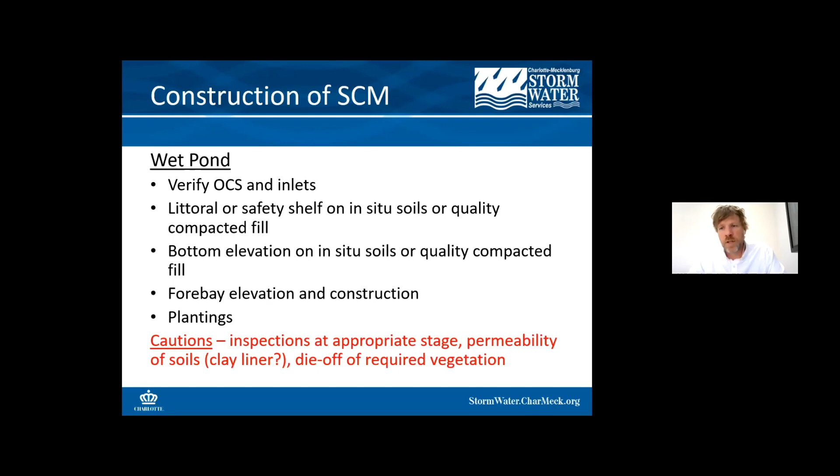For wet ponds, verify the OCS and inlet. Your littoral shelf or safety shelf should be built out of in situ soils if possible, and if not, out of quality compacted fill. It's important to pay attention to the permeability of your soils. You might need a clay liner, or you need to make sure your drainage area is large enough to keep the littoral shelf covered. If you can't, you're going to expect some die off of that required vegetation.

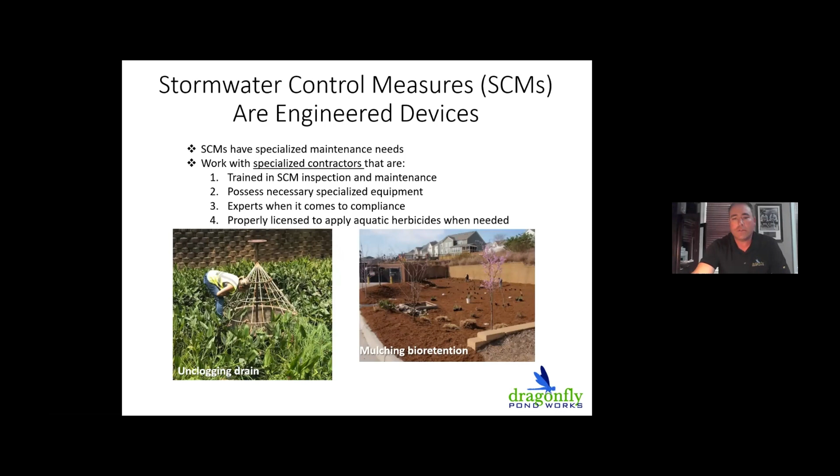We don't just go in there on a maintenance standpoint and treat when we don't need to, but keeping those clean of algae and other vegetation growth is super important.

So some of the basics for the wet ponds: invasive vegetation control. Those cattails that come in, you do want to treat those and make sure they're not coming in, algae and others as well. Specialized mowing around these basins - as Sean mentioned, they are becoming difficult sometimes to get into some of these basins. So, clogged drains and leaking structures.

Trash and debris removal, addressing erosion and bare soil, which do cause issues in these wet ponds or dry ponds. Nuisance wildlife - beavers, geese, muskrats - are really the top three pests or nuisances that we really need to safeguard some of these basins from.

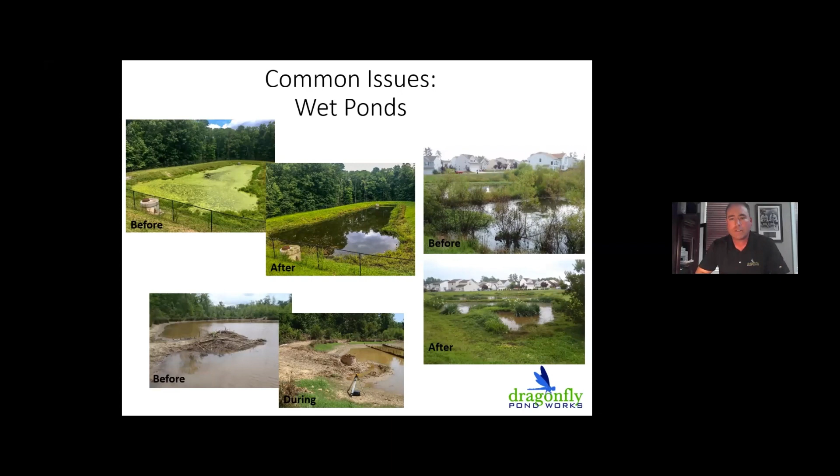Riser issues are so costly, so having eyes and ears on that property every month maintaining wet ponds and other ponds is super important to stay on track and make sure things aren't getting worse - they work so fast. So even a month or two can result in a situation that's very costly to come in and rectify.

Just a couple before and after pictures, a couple common issues throughout. So whether it be large vegetation, weeds, or others that lock up these systems, whether it be maybe sediment that laid in too heavy on some of the non-woven fabric, or the perforated pipe getting clogged, or like Sean mentioned, even those pipes being broken up on top—sediment can get into those systems as well, which can trap or clog some of those systems up.

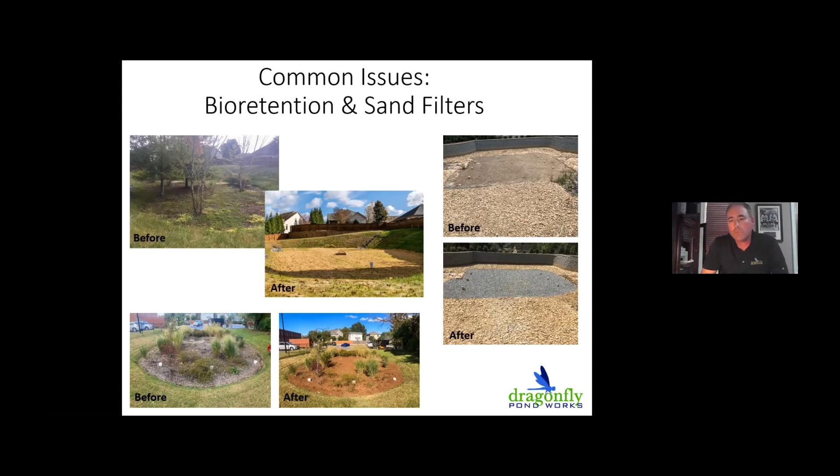Some of the dry ponds—very similar to the wet ponds, but they obviously have a lot more mowing, specialized mowing, weed eating. You have to do this throughout the growing season to be effective. Keep good ground cover, healthy, and trash and debris removal, rearranging some of that riprap—some of the same consistencies with the wet ponds. But control the unwanted vegetation always, in either wet or dry ponds or bios.

Here's some common issues for dry ponds. You can see here before and after. You have to maintain that positive drainage—dry ponds should be dry. We've seen a couple today, and we'll go through a couple more that show the difference there. But you can see where, when these basins are not looked after or taken care of, you run into the situation where you have this growth that comes into these basins.

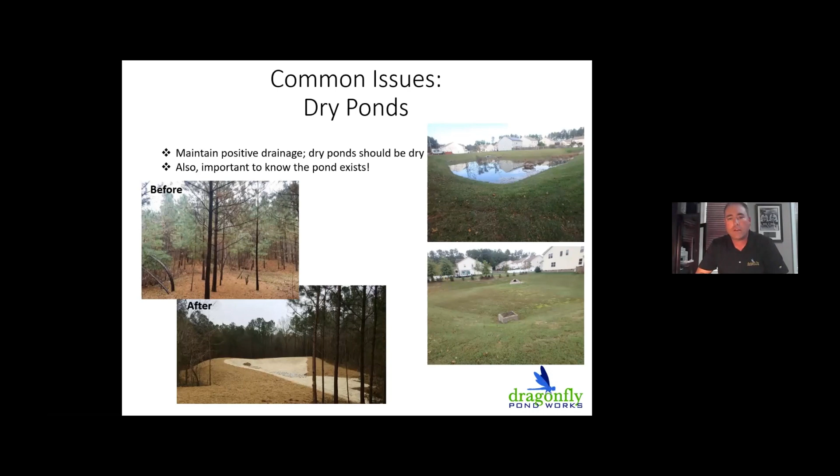As they do the inspections or otherwise, they want to see some of the documentation, so it's important to document the maintenance history on these basins. It's a great communication tool for, as I mentioned, municipalities, engineers, clients. This should include photos, visit dates, and description of some of those tasks or issues that we see. The important piece of this too is, if it wasn't for these reports, many clients or others never even see their pond or structure, wet pond, dry pond, and so on. They just don't see them. So this is helping them to see those issues develop.

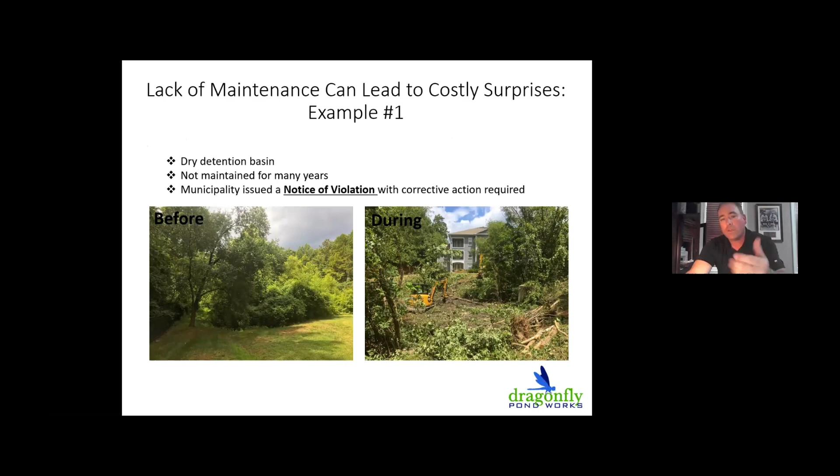We keep an eye on it and explain some of the opportunities to repair or fix those items. This is an example of a very costly issue—a dry basin found here in Charlotte. It was forgotten for many years, which unfortunately is common in a lot of the Charlotte area. The municipality issued a notice of violation and needed to see corrective action on those. So this shows you before and during, and then we'll take a look at after here.

So this is that same basin. It's super important to understand what these basins are supposed to be from the as-built, which many mentioned, and understand some of the elevations, what makes this basin, and how to repair or fix some of those items that come up. It was a $30,000-plus reconstruction to come in and clear, improve the bottom, remove all the tree roots, and clear out trash—there was just so much trash in these basins, compared to a much smaller annual cost. So you really want to watch those unplanned costs for R&M budgets, because for a lot of these multifamily or other clients, it can really put a dent in their budget.

So the city has always been great working with us, working with clients. So that is always good.

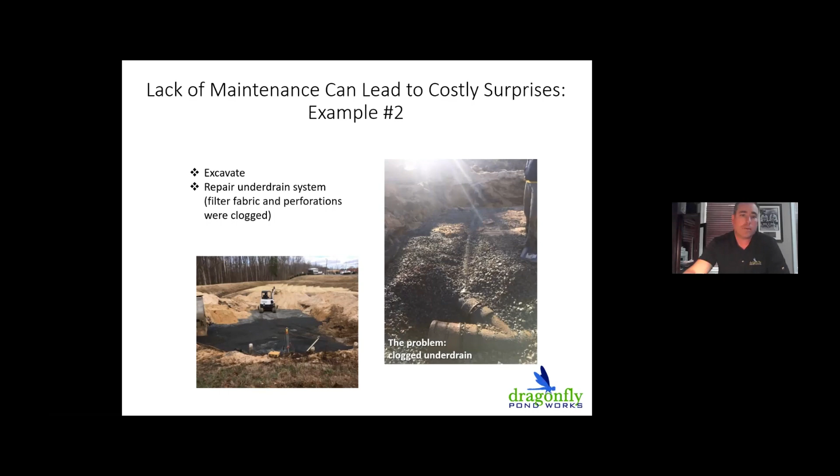This is us just showing the before and after of a repaired sand filter that we did there.

So the stormwater maintenance and inspection program is super important. There is an annual inspection each year that needs to be submitted to the municipalities, usually done by a professional engineer or sometimes the stormwater staff.

We purposely hand off all of our inspections. We support or lead them to people like Sean or other engineers to do some of those inspections. We do not do those in-house by design. So we have the engineers do a lot of those inspections for us, and that's a choice that we made.

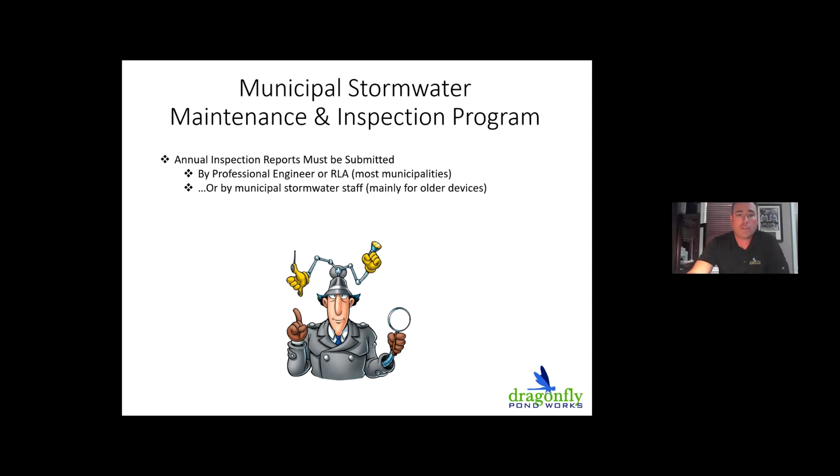You can see from city to city—Raleigh, Durham, Apex, Cary—a lot of them have been ahead of the curve on some of the compliance piece for several years. I know that Charlotte over the last few years has really dialed that up a little bit. They've had additional staffing and others that probably helped out, and we're seeing a lot more of the compliance piece come into play here in Charlotte. I cover Charlotte, Greensboro, and Greenville as well, so I get to be in those markets and support them.

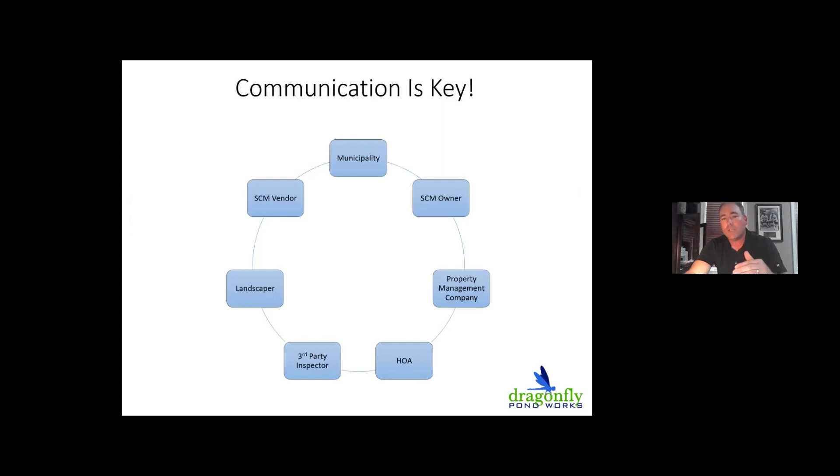Communication is key—we heard that today too. And as you see all the different players that come into play with this, you can see where the questions go everywhere. No one really understands when they get that letter from compliance; some people don't even know that they have a dry pond, wet pond, or other. So we just help them through that process, lead them to individuals or engineers, to whether they just need an inspection done, a proposal to repair, or just to start maintenance. A lot of times they just don't know what those systems are or where to go to get them corrected or fixed.

And we're there to help them organize that and work with the different municipalities, ownership, and so on.

Summary and conclusion: enforcement of stormwater regulations is increasing across the board. Stormwater devices are specialized, and education is key. Offering construction and repair services allows us to better serve our clients—we do maintenance plus construction for all those, and we do that in-house.

So it is all about the people—our clients. But when I say it's all about the people, our teams are awesome in the way that we strive to improve water quality through these systems. That's really what it's all about, and having great people to do that.